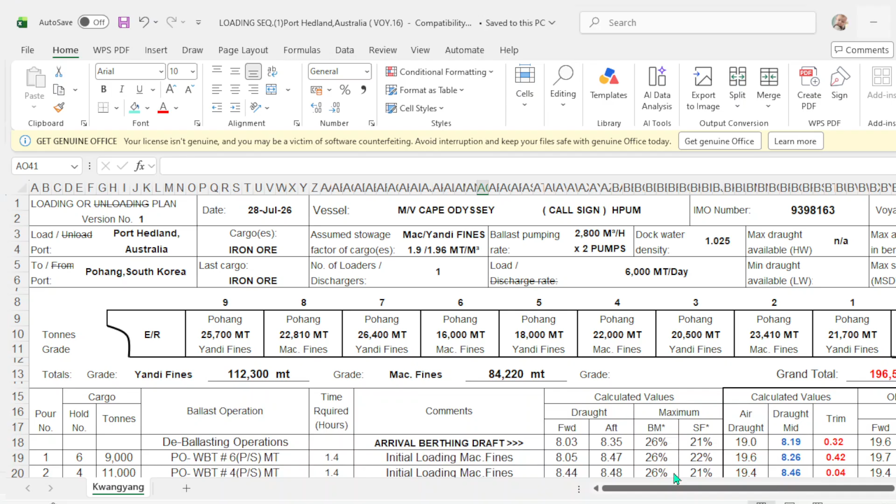This is an actual loading plan again, and the name of the vessel is Cape Odyssey. Take note of the date. It is the present date, due to the program of this laptop, but this was carried out long time ago. And the author of this, the one who made this loading plan, is Chief Officer Roque A. Cabanig. He's the chief officer that I relieved.

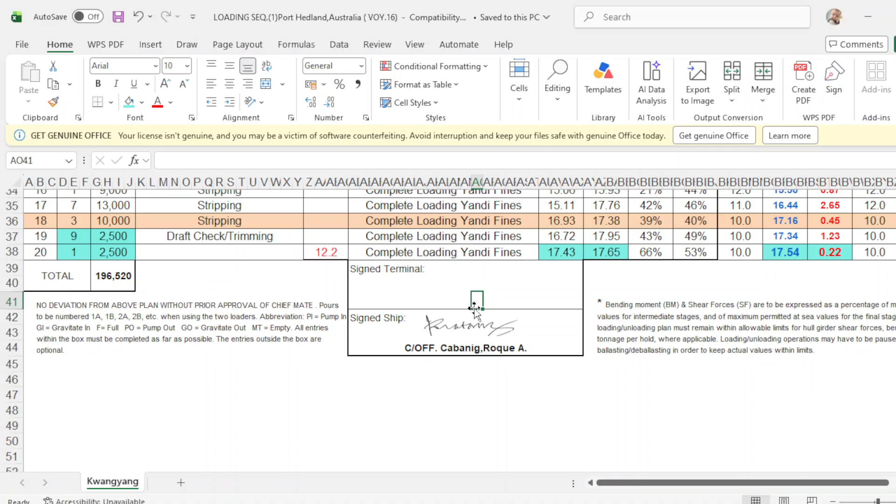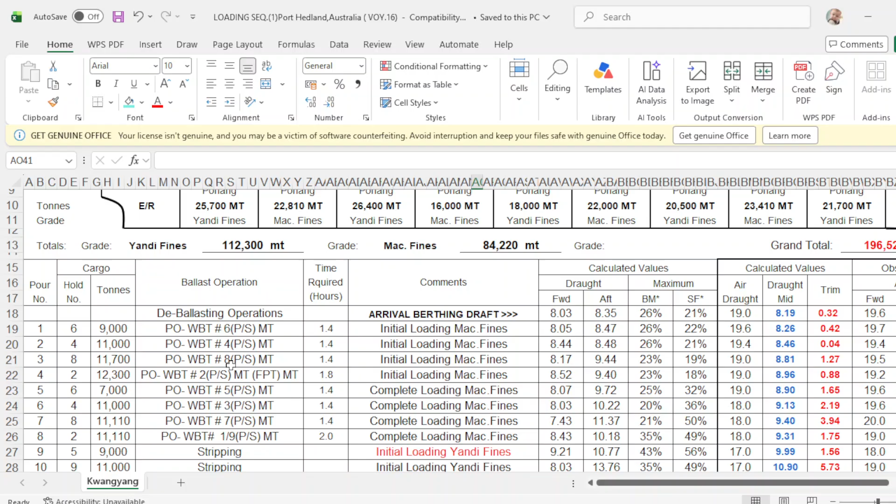Now, again, this is the pour. This is the cargo hold to be loaded and the amount of cargo to be loaded in its hold. This is the ballast operation, and this is number of hours of ballasting per ballast operation. And this is the arrival berth draft of 8.03 meters forward, aft is 8.35 meters. Bending moments is 26%, shearing force is 21%, the mid draft is 8.19, and trim is 0.32. Okay, so make this a little bigger.

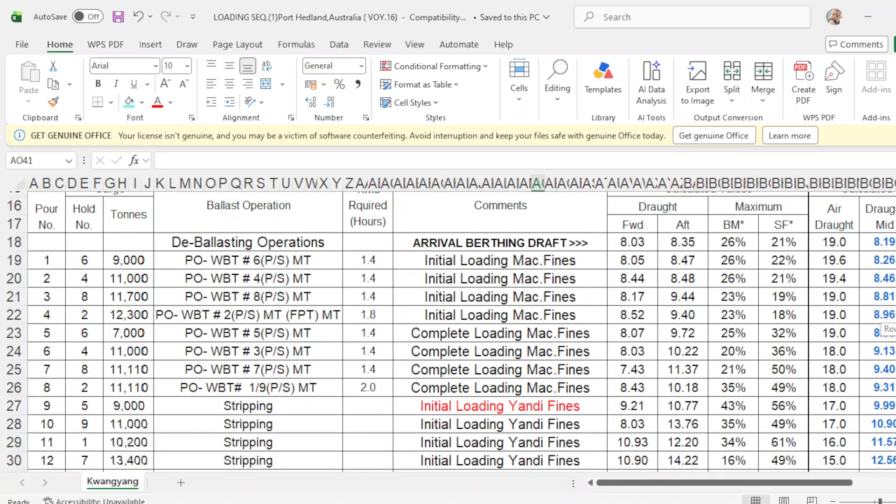Okay, then assuming that the operation is now continuous or ongoing, upon reaching pour number 18, the foreman will stop the loading operation upon completion of loading in hold number 3 of 10,000 metric tons. So he has advised the duty officer to ask the chief officer and the draft surveyor to take the draft reading around the vessel, forward, aft, and mid, so that they can compute for the remaining cargo to load for trimming.

Now, as soon as they completed the draft reading, they both agreed that forward draft is 16.93 meters, and aft draft is 17.38 meters, and the mid draft is 17.16 and the trim is 0.45. So with this agreed draft, we'll put it now into action with our program.

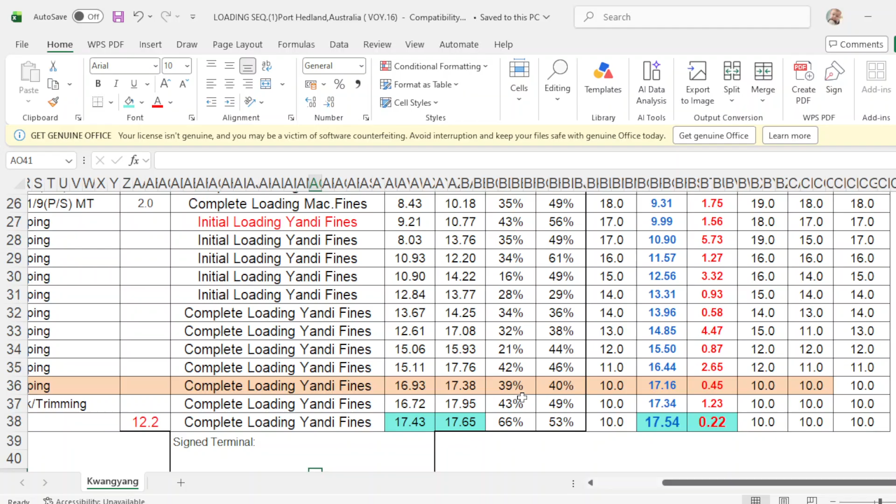So let's go to our program. This is the Cape Odyssey. So we go to form number 6, which is how to find trim when handling several moderate weights. So we put now the forward and aft draft. Forward draft is 16.93. Put here 16.93. And aft draft is 17.38. Here 17.38. Take note that the mid draft is 17.16 and trim is 0.45.

Double check. Mid draft is 17.16 and 0.45 the trim. So it's confirmed. Then you have your LCF, MTC, and TPC. And the actual reading of the mid port is 17.16. And the starboard mid draft is also the same of 17.16. So there's no list.

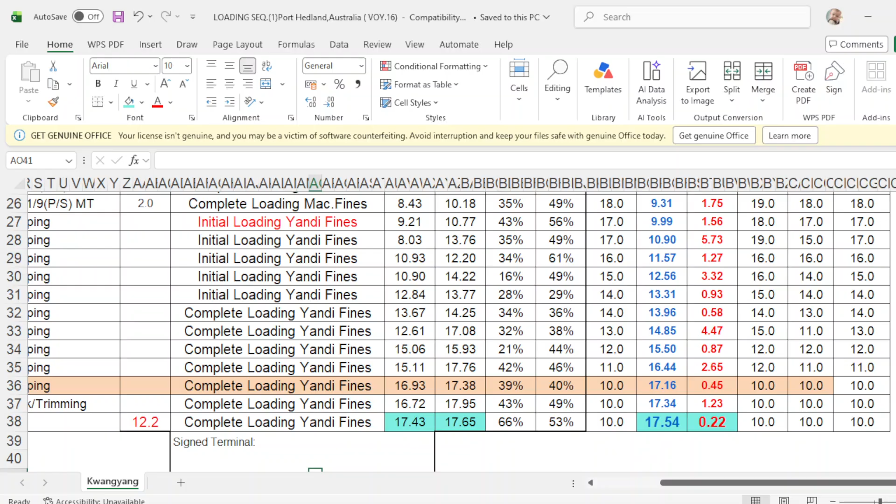And the departure mid draft is how much? 17.54. Put here 17.54. Take note that the density at berth of loading is 1.025 until completion. Once you put here the final mid draft, you will automatically get the sinkage.

Sinkage is 0.38. How do you get this one? Your final mid draft minus your actual mid draft is your sinkage of 0.38. And this will be the amount of recommended cargo to load for trimming. So click this one. You will have the formula K8 times M3 times 100. So letter K and row 8, that will be your sinkage, times your M3, which is your TPC, times 100.

So I will repeat. Total recommended cargo to load for trimming is sinkage times TPC times 100. Then you will get this amount. Take note, in your departure mid draft of 17.54, you will interpolate the TPC. So in the draft of 17.54, the interpolation of TPC is 138.68, which is this one. Now you have already this figure.

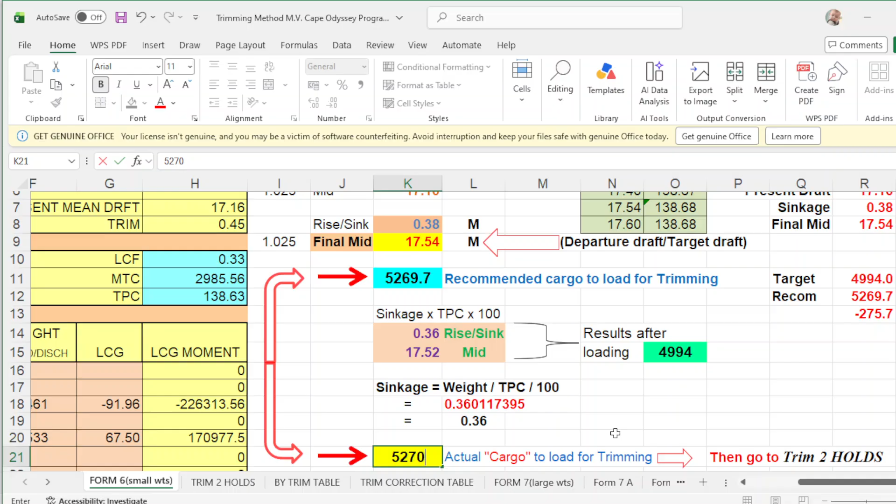5,270 to round it up. So once you put load 5,270, results after loading: then your departure draft, mid draft is 17.54, which is exactly the same here. And your sinkage is exactly the same here of 0.38. Okay?

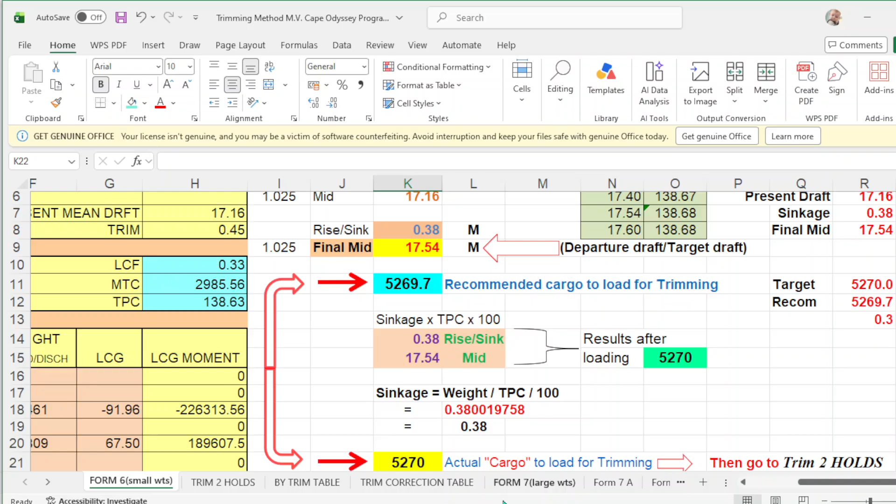Now, since this is your recommended cargo to load for trimming, for actual to load, so you put here 5270, which is rounded up, and you put the TPC of your initial draft. The TPC is 138.63. Okay, so 5270 divided by 138.63, that will be 38.01, and divide by 100, that will be 0.38.

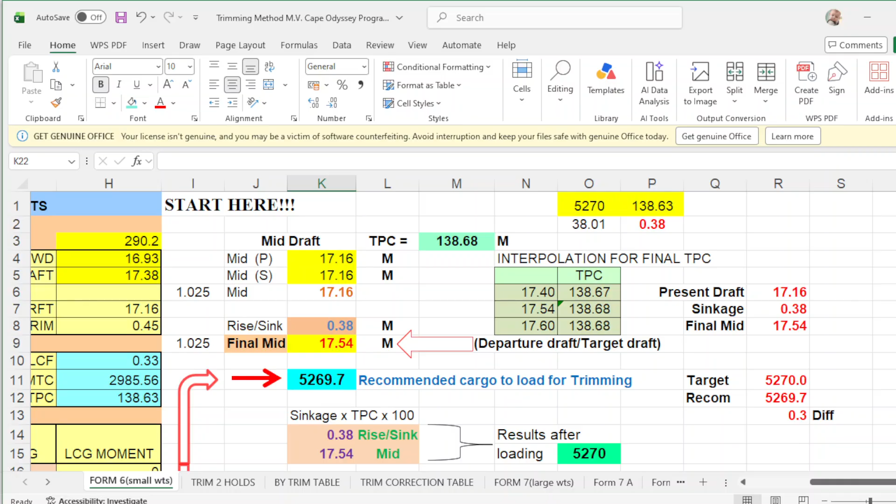Okay, your present draft, mid draft is 1716, and your sinkage is 38. This will be your final departure mean draft of 1754. Your target amount for trimming is 5270, which is this one. This is rounded up, and your recommended is 5269.7. Then there's a difference of 0.3. Okay,

so actual cargo to load for trimming, then you go to trim two holds. Trimming with two holds. Take note the remaining cargo is 5270. This is your initial draft, mean draft, and trim, MTC, LCF, and TPC. Now, what is our trimming hold? Trimming hold, according to our plan, is 1 and 9. So 1, enter, and 9. Okay, let's scroll down.

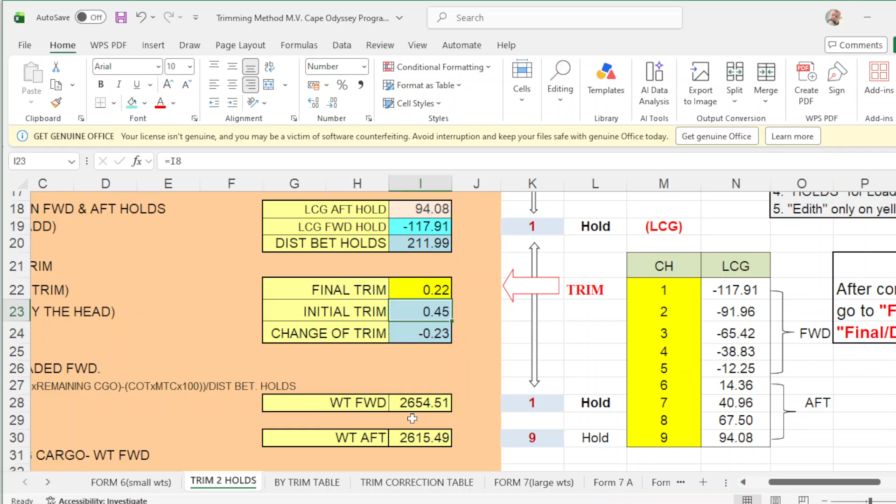What will be our final trim? Our final trim should be 22 centimeters or 0.22 meters. Put here 0.22 meters. Then the recommended to load for hold number 1 is 2654.5. So let's make this 2655. Then number 9 should be 2615.

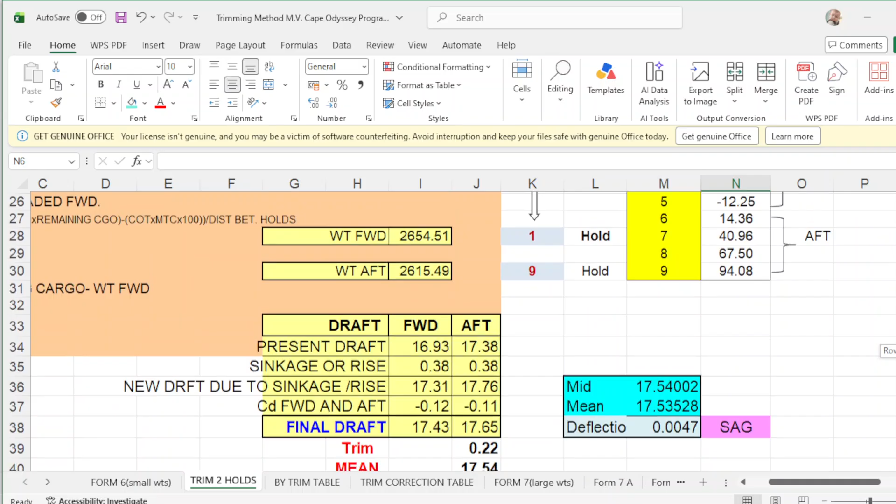There you go. And your departure draft forward will be 1743. And aft draft should be 1765. Okay, your trim is 0.22, your mean draft is 1754, and your deflection is 0. Okay, adjust this one.

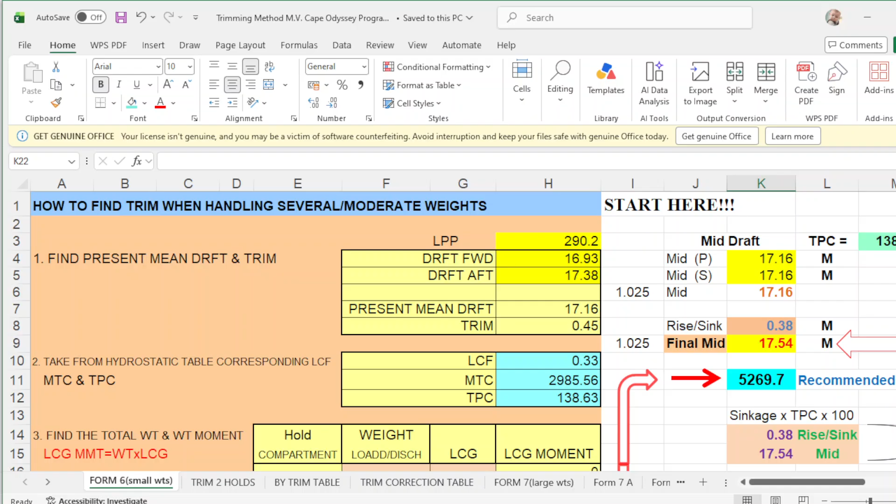Then you go back to form number 6, which is how to find trim when handling several moderate weights. Scroll down. Take note that in number 1, you have to load 2655, and number 9 is 2615. You put it here. Apply the LCG of 1 and 9. LCG of hold 1 is negative 117.91, and hold number 9 is 94.08.

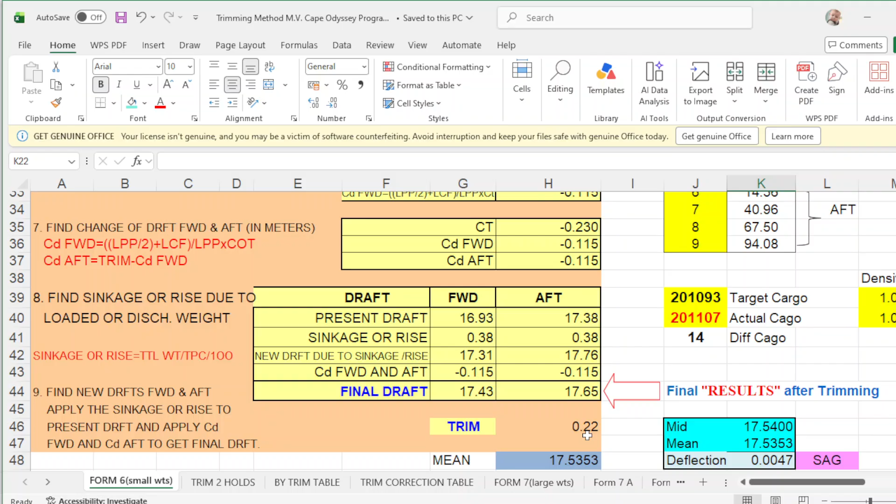Okay, confirm. Then your departure draft forward would be 1743, and aft draft should be 1765. Your trim is 0.22, your mean is 1754, and your deflection is 0.

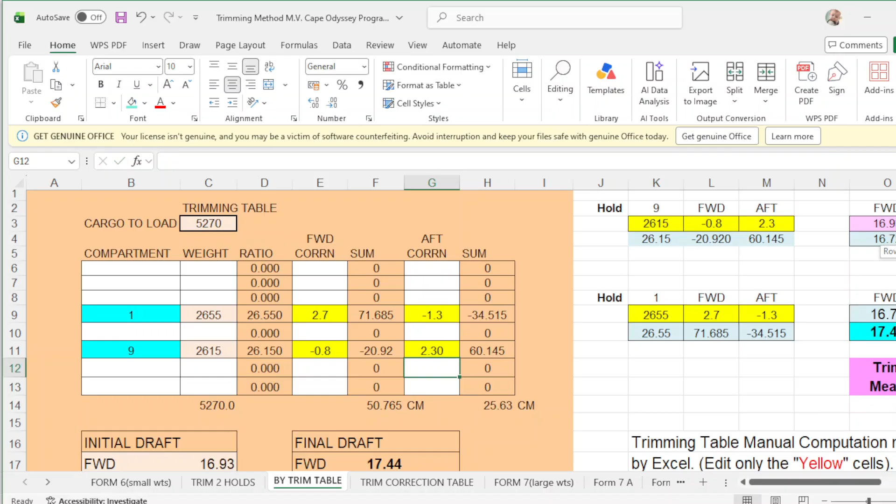And your sailing draft, forward draft should be how much? 1743. Okay, so it's 1 centimeter more. We reduce this one. Make this 2.69. There you go, 1743.

And aft draft should be how much? 1765. So it's less, so you add the correction. Put it 2.31. Nothing changes. Put it 2.32. Still doesn't change. Put it 2.33. Doesn't change. Add more. 2.34. There you go.

The forward, but the trim is 21, less. So you add, make it 5. Still 21. Add more. Put it 6. There you go, 0.22. Okay. So forward is 1743, aft is 1765, mean is 1754, trim is 0.22, and your deflection is 0. Okay?

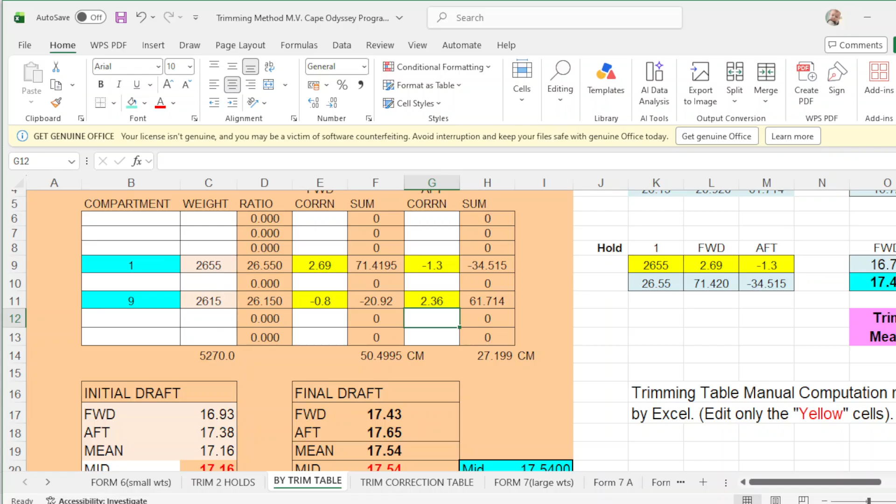Take note here, it doesn't say which hold to load first. So I recommend that we load hold number 9 first to have a good trim. So number 9, the amount is 2615. Correction forward, negative 0.8, aft is 2.36. Hold number 1 is 2655, forward is 2.69, and aft correction is negative 1.3. So confirm.

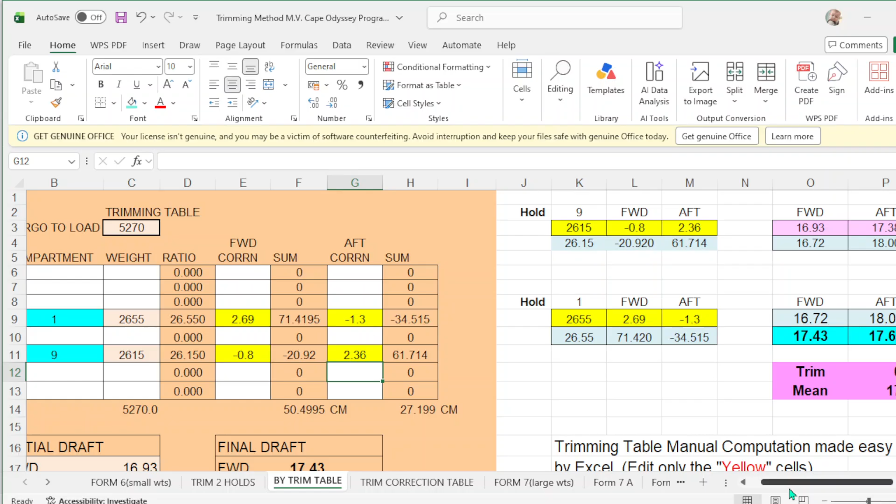So first you have to load in hold number 9 so that you will have a good trim. So after completion of hold number 9 of 2615, this will be your initial draft forward 16.72, aft draft is 18 meters. Then you will load in number 1 of 2655. After completion, after loading 2655, your draft forward will be 17.43, aft is 17.65, your trim is 0.22, and your mean draft will be 17.54, and your deflection is 0.

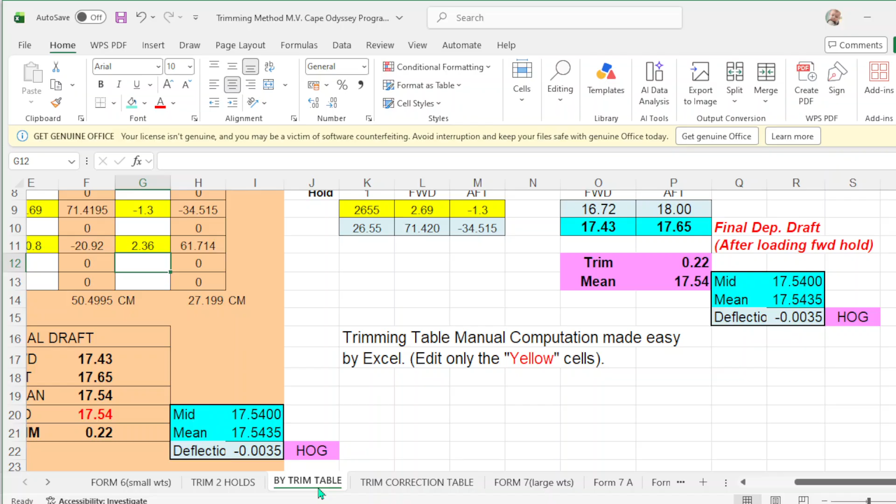Okay, which is the same here. So we have now 3 programs to back you up: form number 6, trim 2 holds, and by trim table. So we go to the last program, which is form number 7. Form number 7 is how to find draft and trim when handling weights involving large changes in draft.

Take note that the density at berth is 1.025. Okay, 1.025. So you put here 1.025, and upon completion the density will also be 1.025. That is the density. So what is the draft forward? The forward is 16.93. Put here 16.93. Draft aft is how much? 17.38. Put here 17.38. Okay, then scroll down.

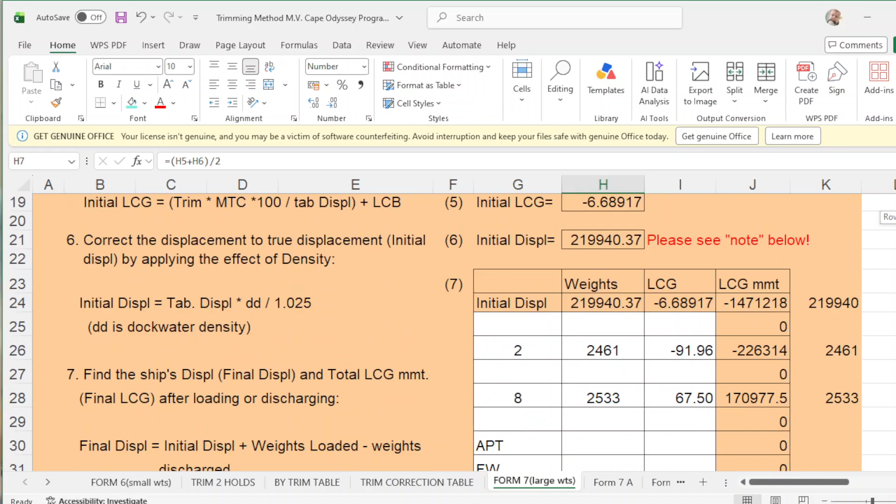You put now the amount of cargo for trimming. So what you do, this should be hold number 1, put it like this, go to trim 2 holds, then click 1. Then you go to the cargo, equals, then you go to this cargo. Okay, press enter, and the LCG of hold number 1, this will be, click this one, then there you go.

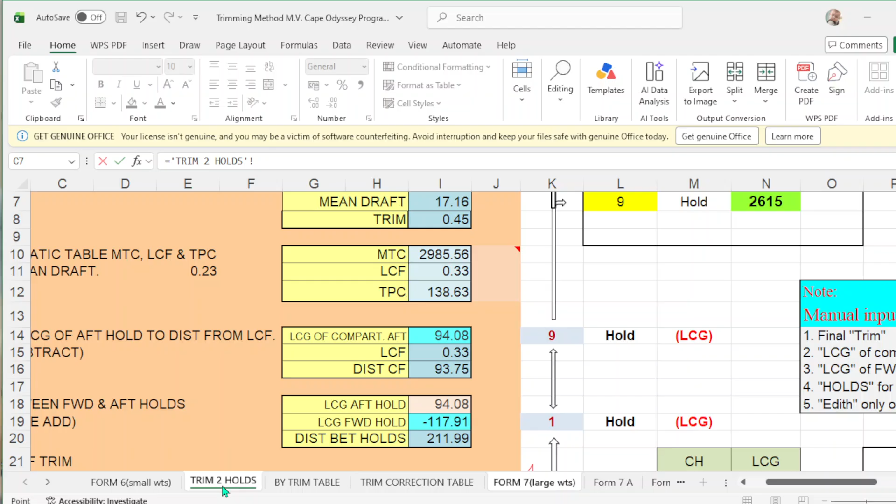Then the other cargo hold is hold number 9, press this one, equals, go to trim 2 holds, then you press this one, 9, there goes 9. Then the weight, put equals, go to trim 2 holds and click the weight. Then the LCG equals, that's hold number 9. Scroll down, and number 9 is this one. Okay, so updated this one already. Scroll down.

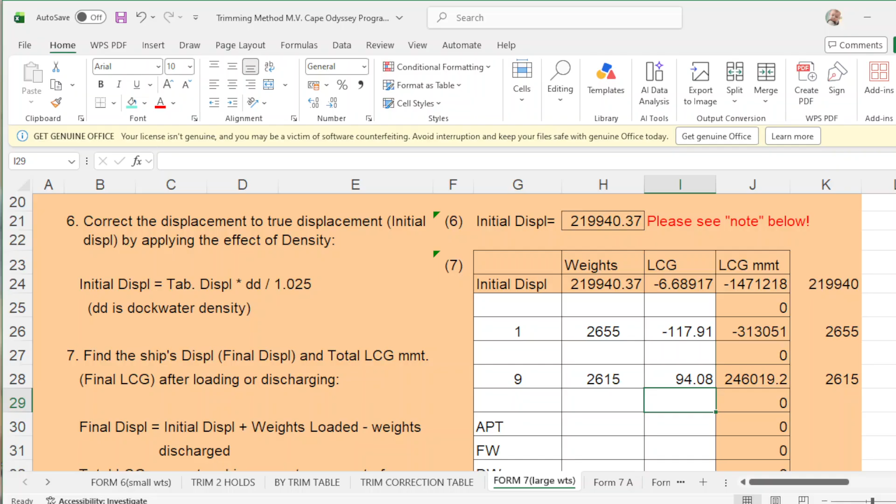And your departure draft forward is 17.43, and aft draft is 17.65, you have 17.64, and your mean draft is 17.54, and your trim should be 0.22. Okay, 0.22, and your deflection is 0. I mean, your mean is 17.54 and your trim is 0.22. If you round it off, then you have your 0 deflection.

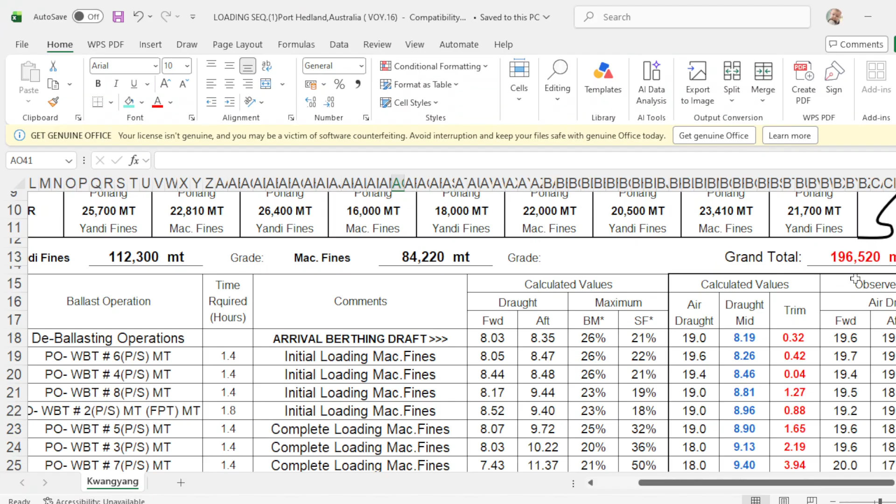Again, I will advise that what's more important is your mean draft. If your mean draft is 17.54, then you will have the exact departure draft or the amount of 196520. So in your program, form number 7, if your mean draft is 17.54, then you will get the exact amount. Regardless of your draft forward and aft, what's more important is if you can get the target mean draft of 17.54. Okay, so this is form number 7, that is number 1.

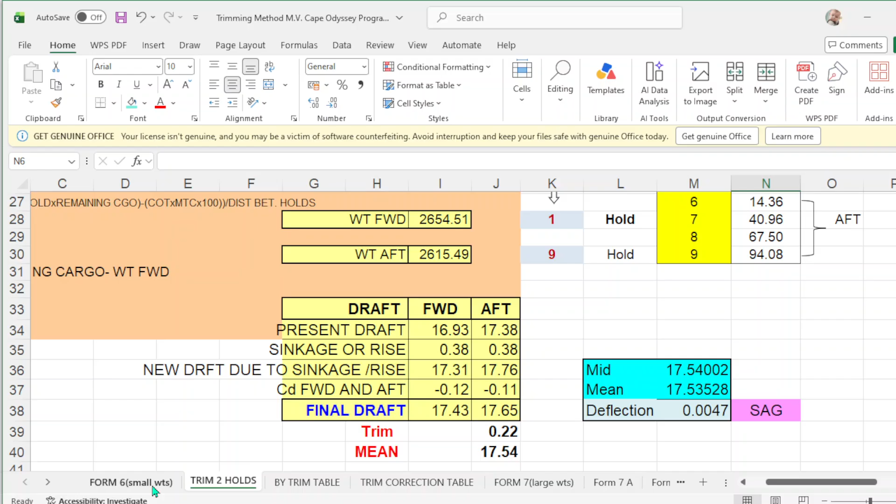Number 2, by trim table, the same departure draft and mean draft and your trim. And number 3 program, trim 2 holds, you still have forward draft of 17.43, aft draft of 17.65, 22 centimeters trim and 17.54 for your mean, 0 deflection here. And number 4 is form number 6. You still have the same forward draft of 17.43 and 17.65 aft, trim of 0.22, mean is 17.54. So you have 4 programs to back you up: form number 6, trim 2 holds, by trim table, and form number 7.

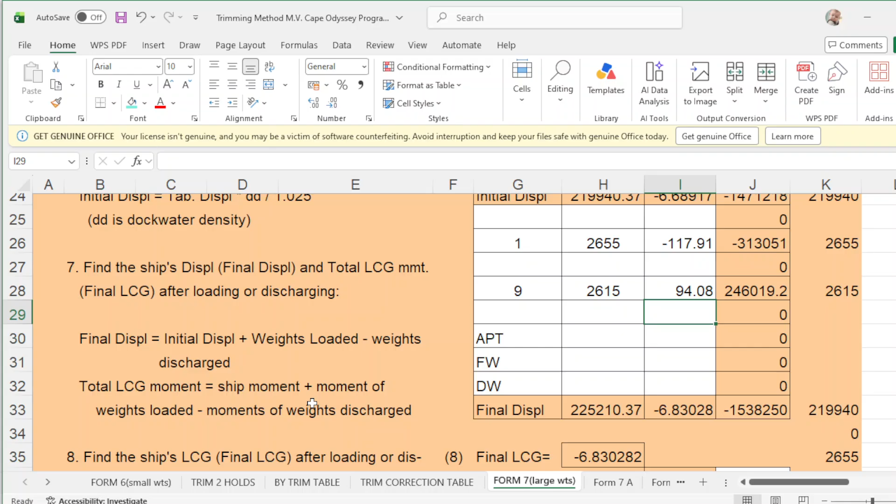Okay, so this loading plan is for a Capesize vessel, Cape Odyssey. Okay, now with the same figures here, we will try to use another Capesize vessel. This time we will use MV CPO Europe. Okay, this is another vessel. So let's start with form number 6.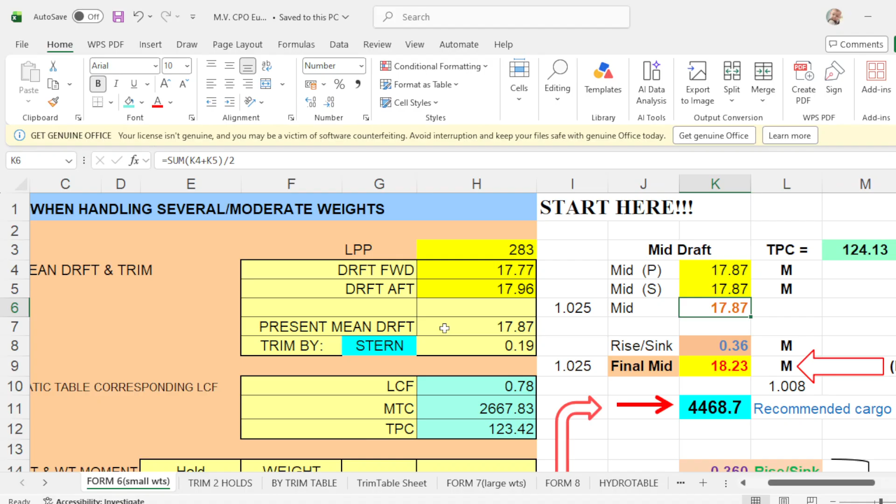What was the initial draft? Initial draft is 16.93. Put here 16.93, and aft draft is 17.38. Okay. Take note, your mean is 17.16, trimmed by the stern of 0.45, your LCF, MTC, and TPC. So, actual mid port is 17.16. Then your mid starboard is 17.16. Okay.

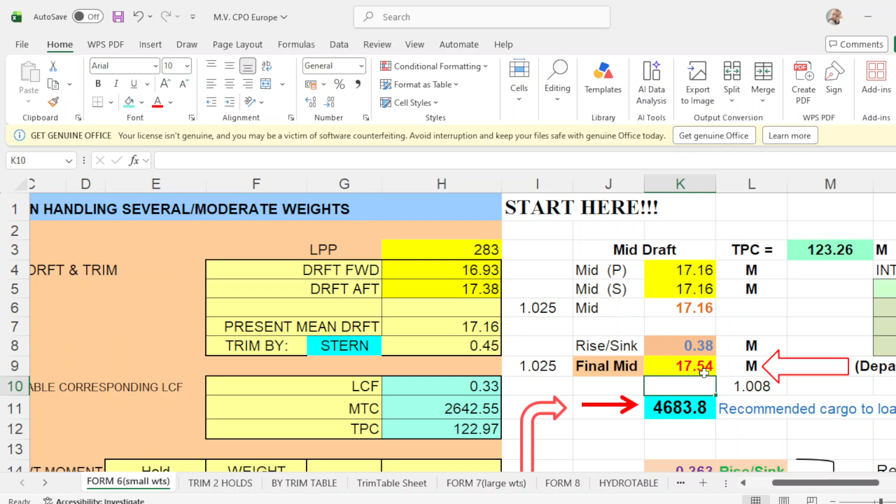The density at berth is 1.025. Upon completion, the density is still 1.025. Your departure draft is how much? Departure draft is 17.54. Put here 17.54. Okay. With this final departure draft, the recommended cargo to load is 4683.8. Okay. So you scroll down, just follow this arrow, then round this up, 4684.

So once you loaded 4684, after loading 4684, your mid departure is 1754, which is exactly the same here, and your sinkage is 0.38, which is the same here.

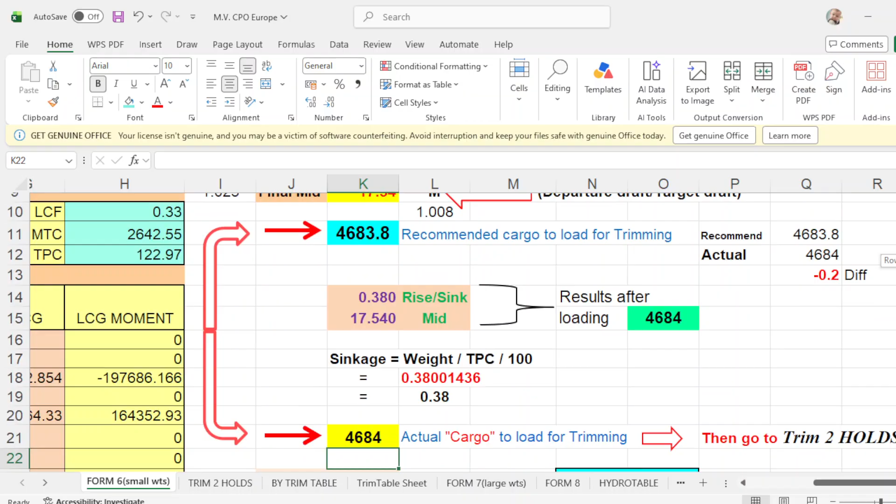Since your cargo to load is 4684, you put here 4684, and the TPC of your initial draft is 12297. So 4684 divided by 12297 will be 38.09. Divide this by 100.

That will be 0.381 or 0.38. Your present draft is 1716. Apply your sinkage of 0.38. Then your final departure will be 1754, and the recommended cargo to load for trimming is 4683.8.

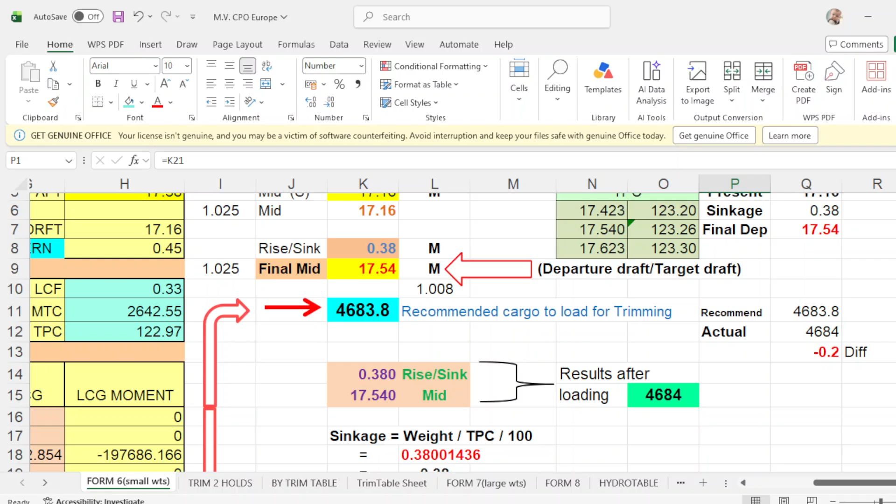The actual cargo to load is 4684. Then there's a difference of negative 0.2. This is the actual cargo to load for trimming is 4684.

Then you go to Trim 2 Holds, trimming with 2 holds. Take note, this 4684, your initial draft, mean draft, trim, MTC, LCF, and TPC.

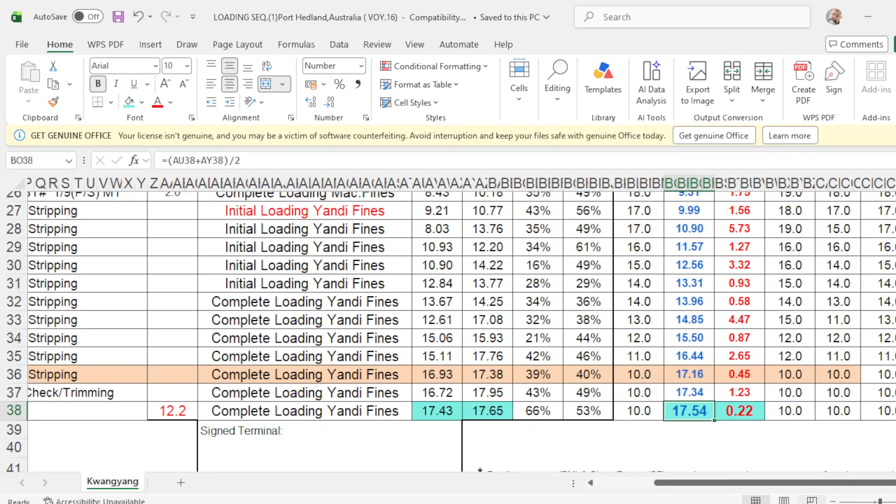So what is the trimming hold? Trimming hold is 9 and 1. Take note, guys, this is 2 and 8.

This will also change, this 2 and 8 and this one. So we put here 1, there 1, and 9. Take note that it has already changed to 9 and 1.

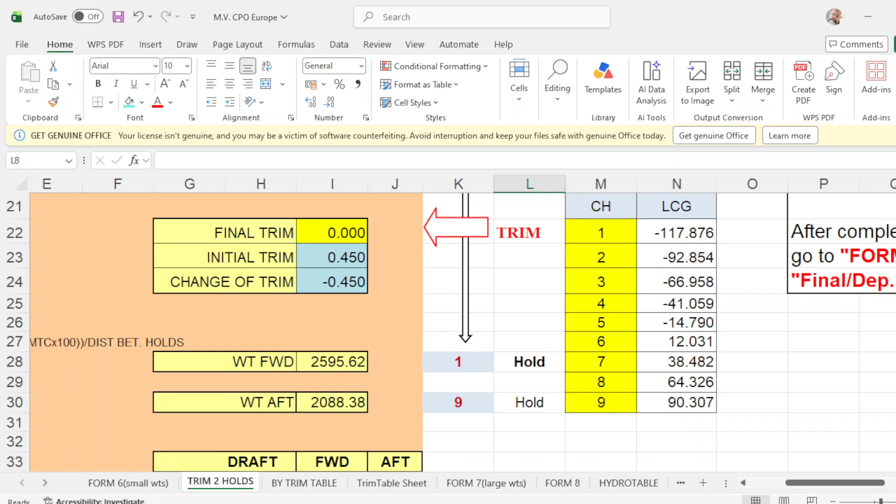Now, how much then your trim? What should be your trim? That will be... Final trim should be 22 centimeters or 0.22 meters.

So you put here 0.22. And your final departure draft would be... the recommended cargo to load for hold number 1 is 2316, rounded off to 2316.

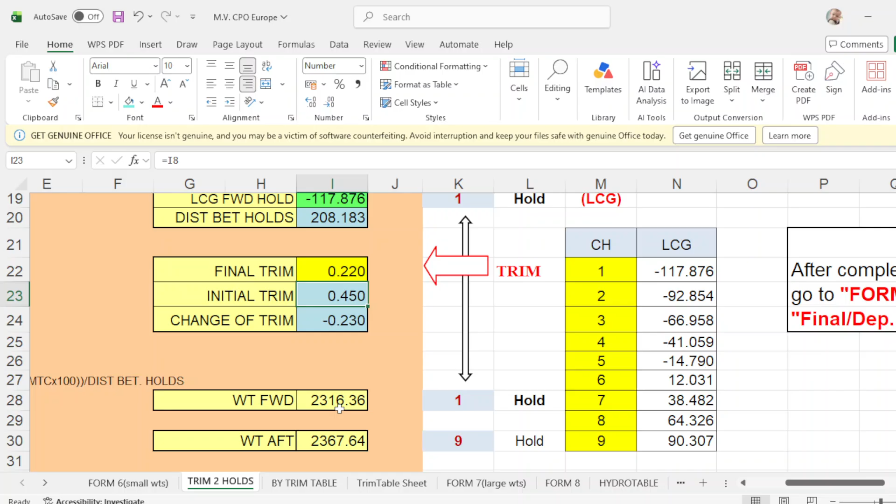You put here 2316, 2316. And number 9 should be 2368. Okay, and your final departure draft forward would be 1743.

1743, and aft should be 1765. Your trim should be 022 and your mean draft is 1754.

If you run it up, you now have your deflection of 0. How do you get deflection? Mean draft minus your mean draft is your deflection, which is 0. So this is the first program.

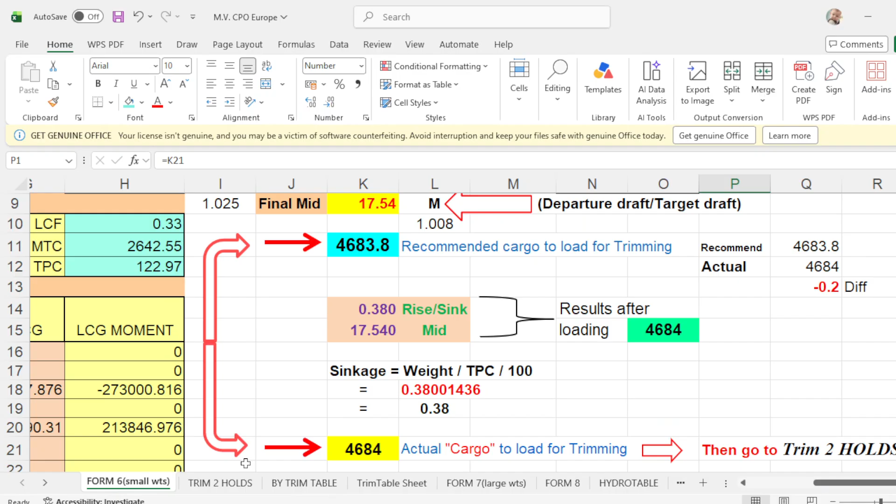Form number 6, and your trim 2 holds. Then we go by trim table.

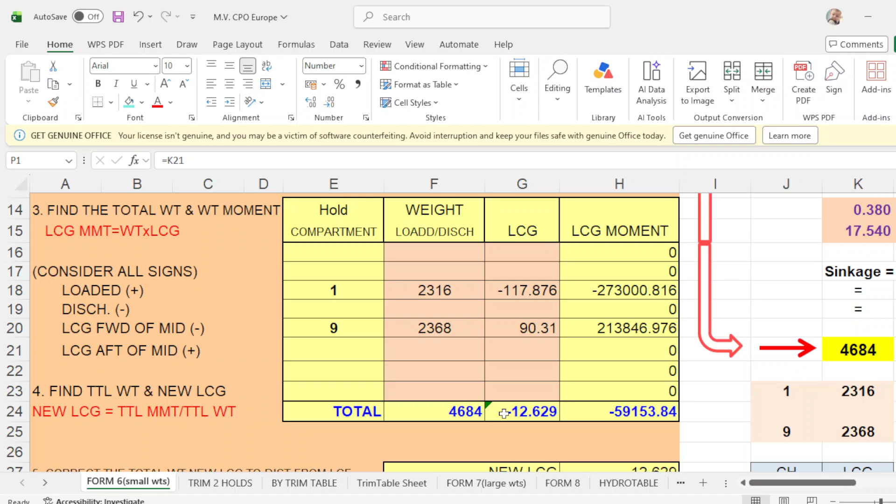Take note that the trimming cargo to load is 4684. It is 4684. Trim table, of course.

4684. And number 1, number 9 is the trimming hold. The amount is 2316, 2316. Check on that: 2316, 2368.

Then apply the forward correction of number 1 and number 9. Forward correction of number 1, this is CPO Europe. So forward correction number 1 is 2.7. Put here 2.7.

And aft correction is how much? Negative 1.3.

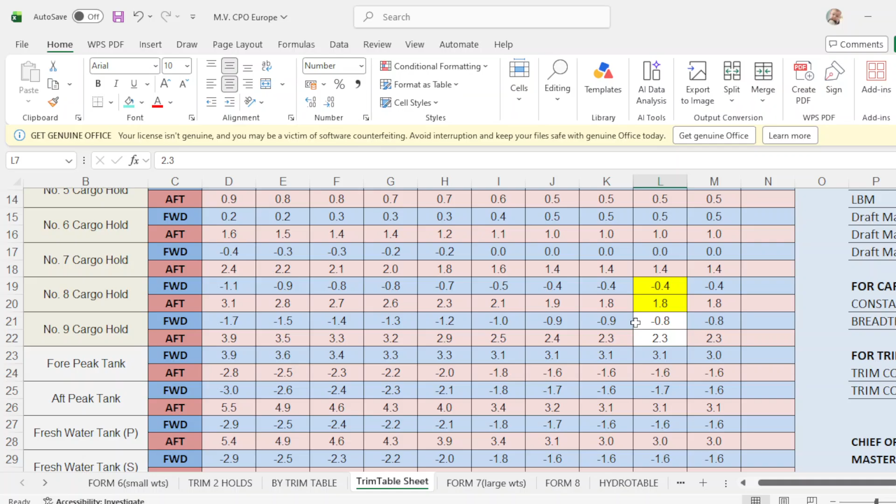And number 9, forward correction. Scroll down. So this will be number 9, forward correction is negative 0.8. And up correction is how much? 2.3.

Then you put here 2.3. Then departure draft forward is 1737, aft draft is 1762, and your trim by the stern is 0.26. It should be 22.

So less draft forward, so you adjust the correction forward. So drop should be how much? 1743, this should be 43.

So increase this one to 2.8. There you go, 39, 42.9. 1741, make it 3 meters.

So it's more, that's so 2.99. Make this 2.99, 43.

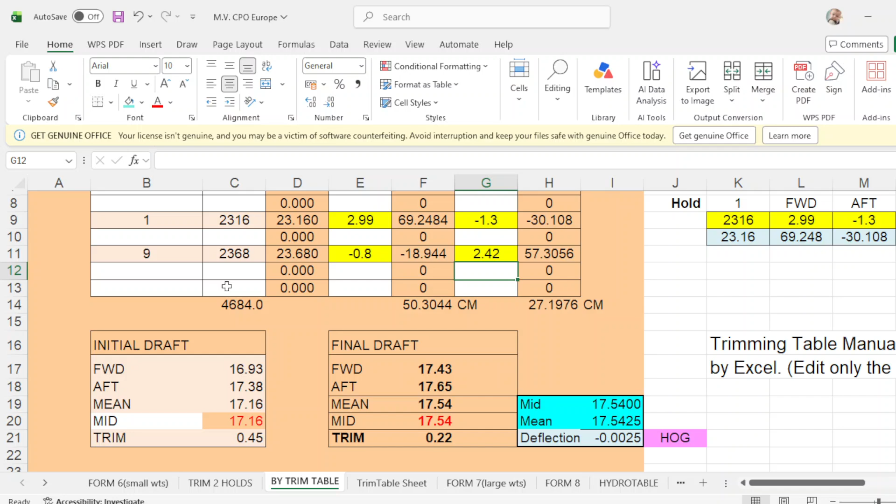There you go. Forward is 1743. Aft draft is 1765.

Your mean draft is 1754, and your trim is 0.22.

No, it increases. So it should be 2.42. Then we have this drop. Then we go now. This is 1, 2, 3.

And the last program, we go to form number 7, which is how to find drop and trim when handling weights involving large changes in mean draft.

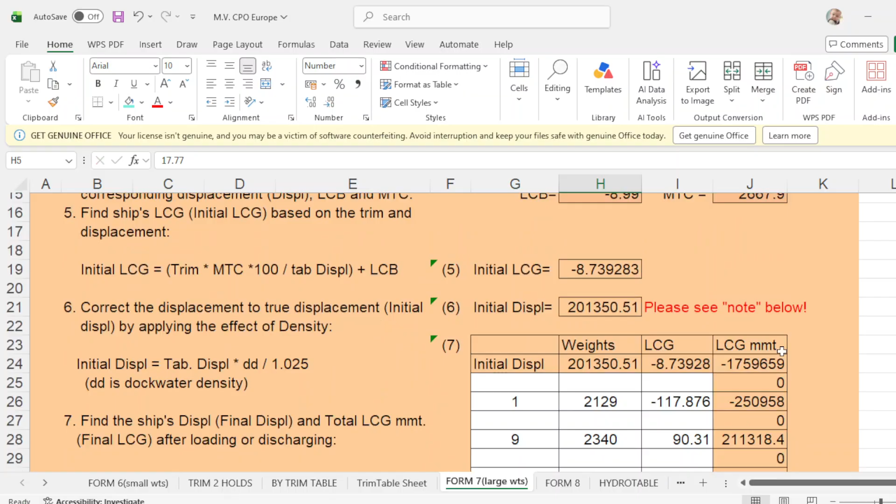Take note of the initial density at berth was 1.025, and until completion, the density is 1.025.

And the initial draft forward is 1693. Oh, we can use this one, 1693.

16.93. Draft aft is 1738. 17.38. Okay.

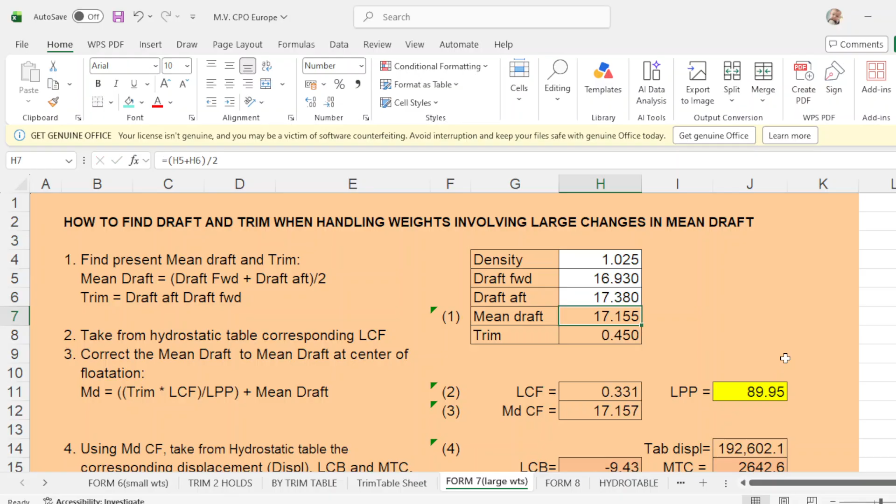So what is this? Now your trimming hold is 1 and 9. How much cargo to load in number 1? Number 1 is 2316.

Click this one. Click this one equals number 1, 2316, and number 9 what equals? Click trim 2 holds, then click number 9, the amount of cargo. Okay, check the LCG.

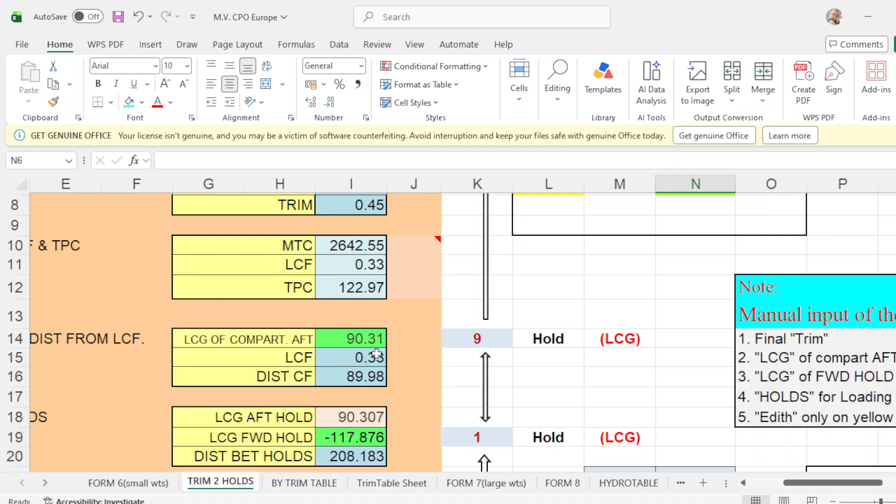Scroll down. LCG of number 1 is negative 117.876, and number 9 is 90.31. Okay, so confirm, same.

And your departure draft will be forward of 1743, aft draft is 1765, and your mean draft is 1754.

And your trim should be 022. If you run off this one, this should be 022.

Again, I say the mean draft is more important, because if you get this 1754, which is according to your plan, if your mean draft is 1754, then you will get the target total amount of 196520.

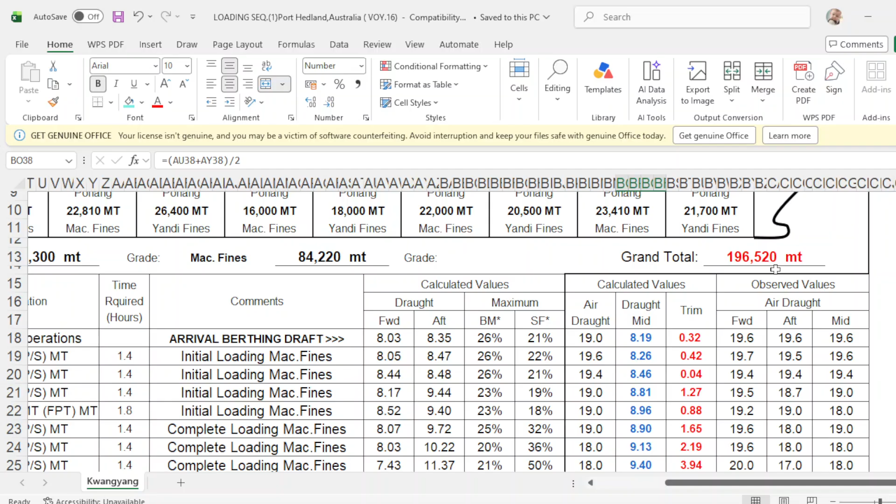So this is CPO Europe. Then we go now to the last vessel, which is MV Cape United. This is also a capesize vessel. So let's go to the draft forward.

Okay, draft forward is 1693, 16.93, and aft is 1738, 17.38.

Then you have your mean draft of 1716, trim of 045, LCF, MTC, and TPC. So your actual mid port is 1716, 17.16, and starboard is 17.16, 17.16.

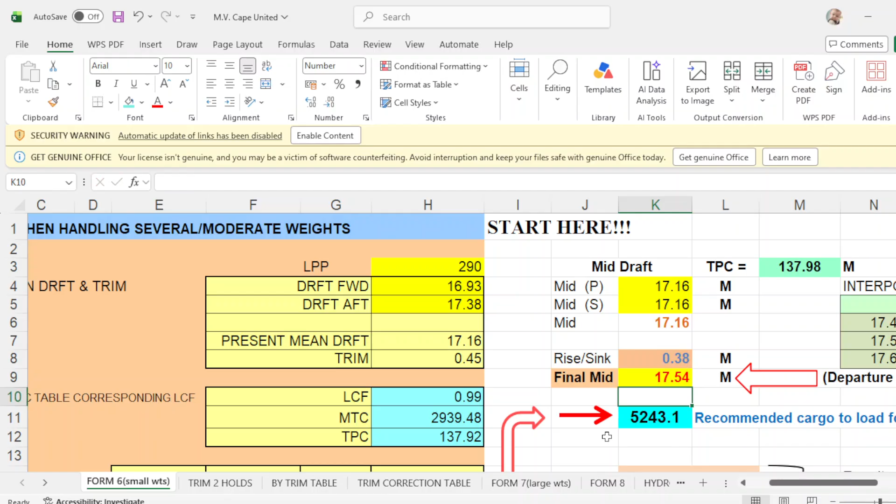And your departure draft is 17.54. Okay, put here 17.54. Then your recommended cargo to load for trimming is 5,243.

But according to your plan, your recommended cargo to load is only 5,000. But you recommend only for 5,243. Okay, you follow the initial density forward.

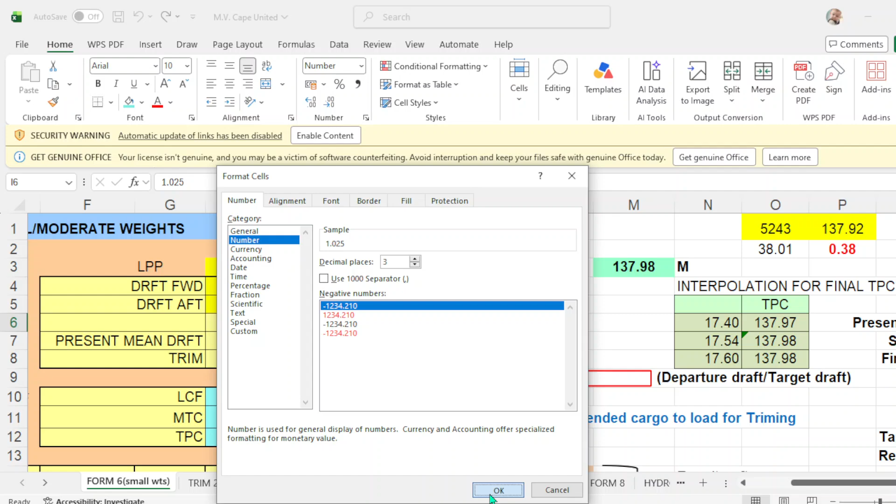The initial density of loading at berth is 1.025, and upon completion is 1.025. Okay.

Copy and paste. Okay, since this is the recommended cargo to load of 5243, so you put here, follow this one, put here 5243.

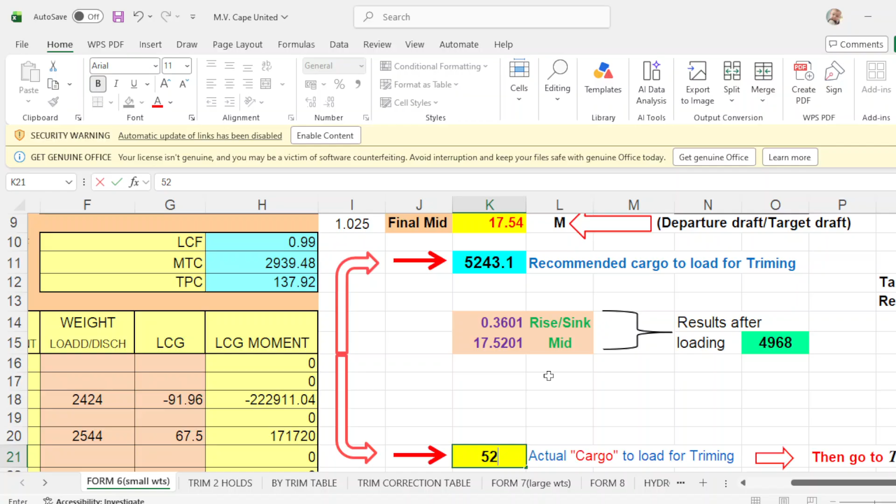Then results after loading 5243, then your departure draft, mid draft is 1754. This is exactly the same here, and your sinkage is 0.38, which is the same here. Okay.

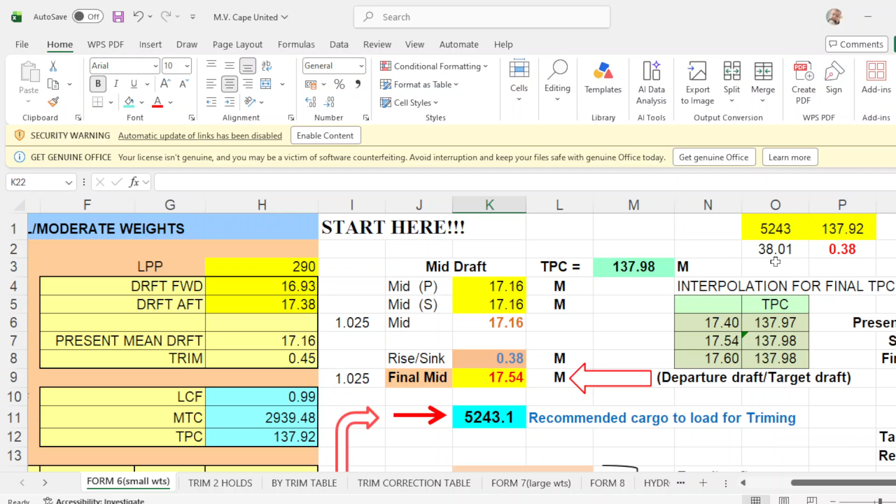And take note again, to get another sinkage, your recommended cargo to load trimming is 5243. Put here the TPC of your initial draft, which is this one, 13792. So divide 5243 by 13792, that would be 38.01. Divide this by 100, that would be 038.

Okay, and your present draft is 1716. Your sinkage is 38, and your final mid draft is 1754, which is this one, and your target draft is, which is this one, 5243, and the recommended is 52431, and your difference is negative 0.1.

Okay, then you go to trim 2 holds. Take note, the cargo to load is 5243, which is this one, 5243. Okay, this is your initial draft, mid draft, MTC, LCF, and TPC.

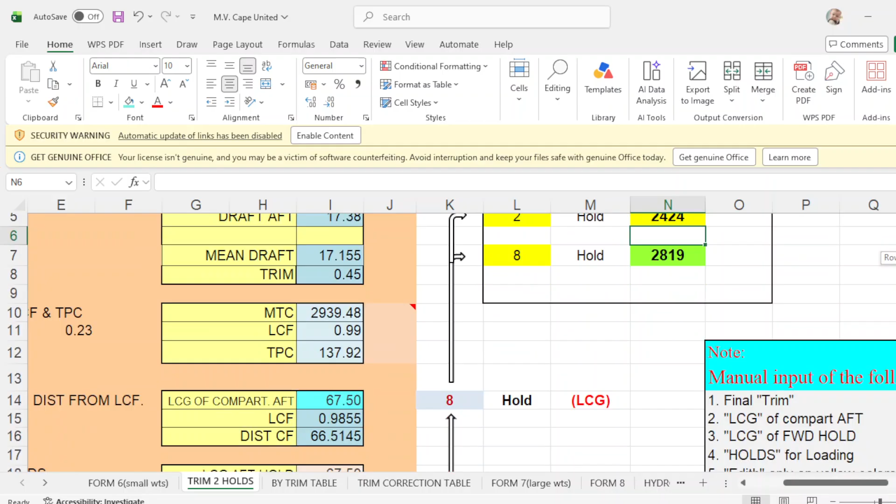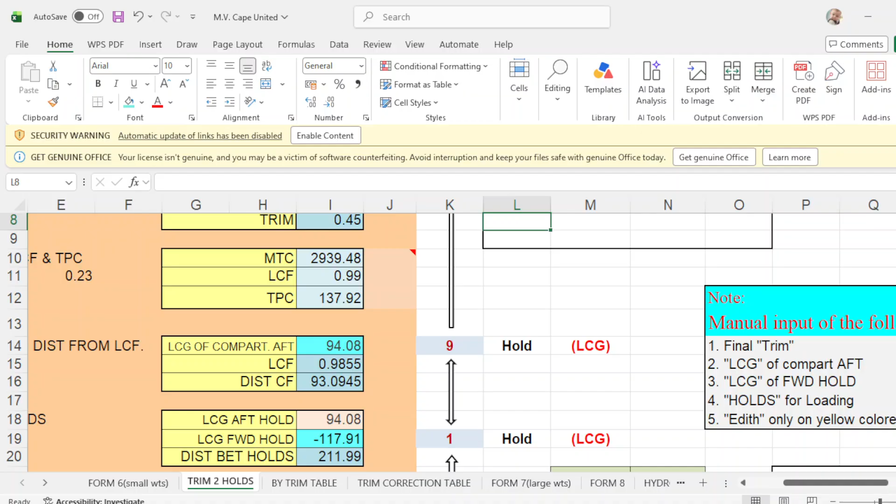Again, change the trimming hold is 1 and 9. Take note, this will change. This will also change. Okay, so put here number 1, cargo hold number 1, there, and cargo hold number 9. And take note, it has already changed to 1 and 9, and change here 1 and 9.

Okay, once you change this cargo hold for trimming of 1 and 9, what will be our recommended trim? Okay, according to our plan, our trim should be 22 centimeters. Okay, so 22 centimeters, put here 0.22.

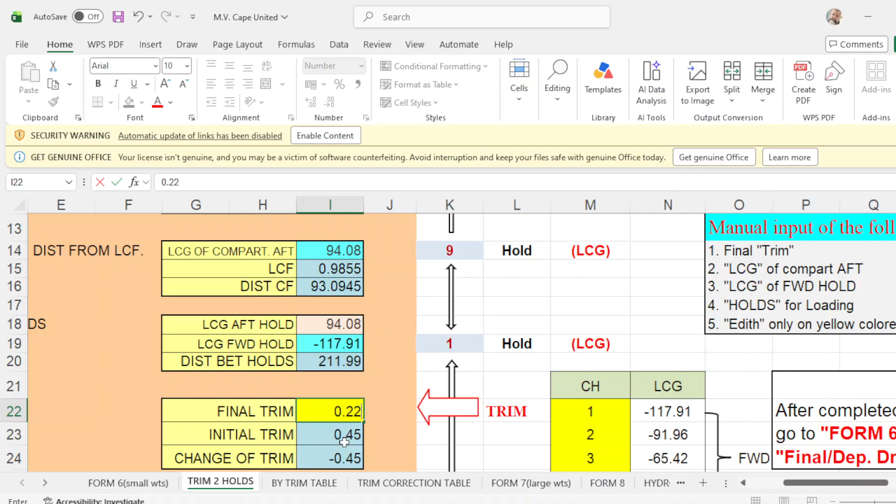Then it will recommend what to load in hold number 9 and number 1. So number 1, you recommend to load 2621. Put here 2621, and number 9 should be 2622.

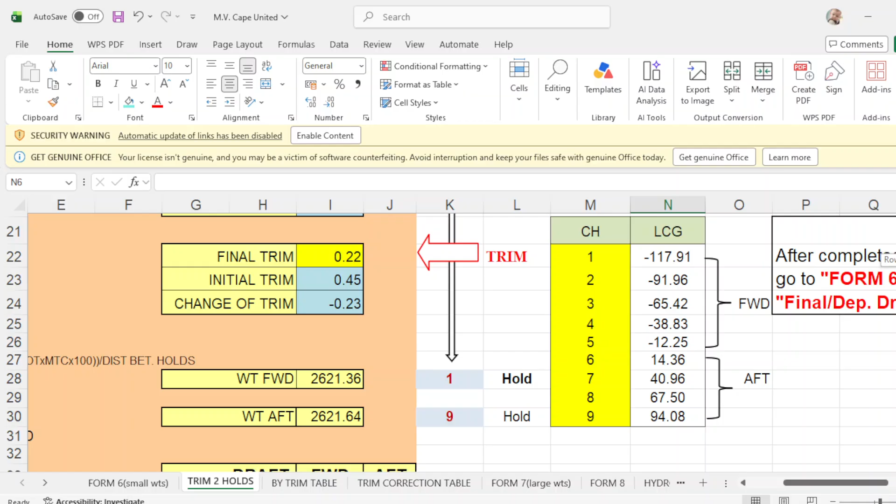2622. Run it up, and your departure draft will be forward of 1743, aft is 1765. Your trim is 22, and your mean draft is 1754.

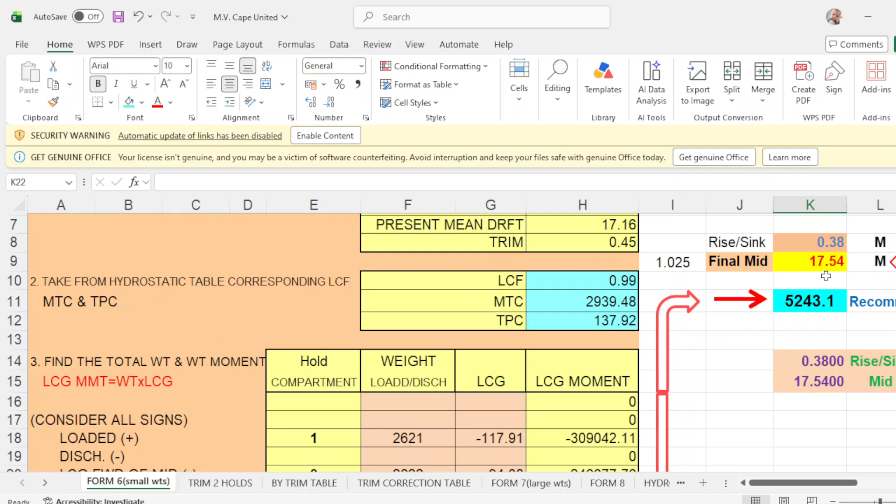Okay, 1754 for this one, departure draft 1754, and your deflection is 0. Okay, mid minus mean equals 0 deflection.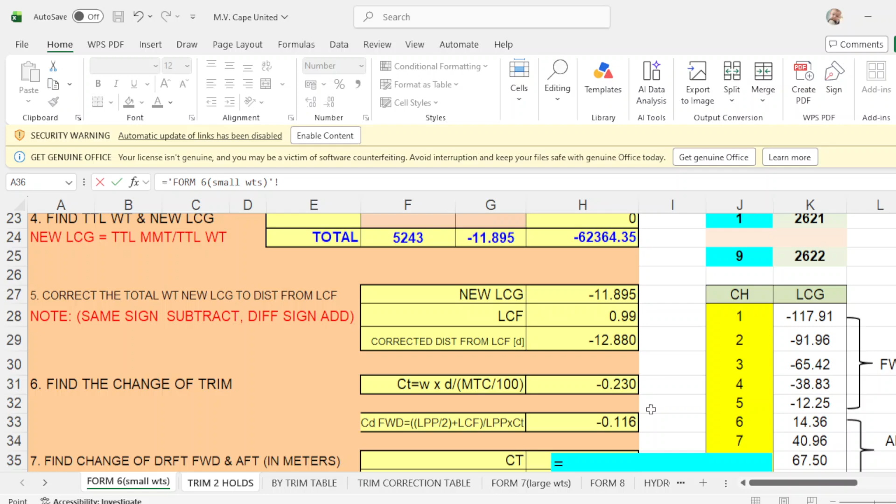So how do I get this one? Put this, okay, or 0. So I'll get this one, mid, put equals, go to form number 6. This is your departure mid. Okay, enter, and your mean equals, this will be your mean.

Then that will be program number 1 and number 2. Program number 3 by trim table, trimming table. Take note of the cargo to load is 5243. Okay, 5243. This is number 1 for trimming hold 1 and 9.

This is the amount cargo for trimming of 1 and 9. So 2621, and 2622. Okay, 2622.

So we now apply the correction, forward and aft correction, hold number 1 and hold number 9. So hold number 1, cape size, number 1, this will be 8. Okay, put this, no field. So number 1 is 2.7. Nearest 18. The draft, your departure draft is 1754, so it's almost 18 meters.

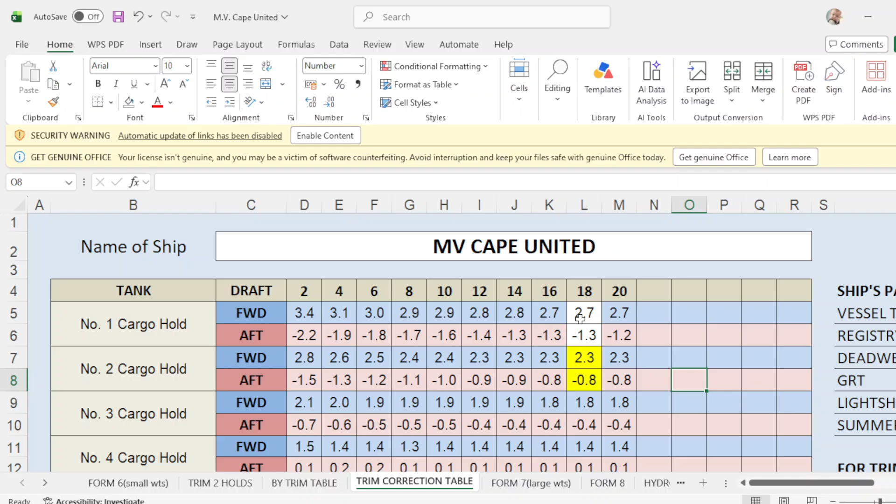That's why I choose 18 meters and not 16. So the nearest, so forward hold number 1 is 2.7. So put here 2.7, and aft correction is how much? Negative 1.3. Then a forward correction in number 9. Scroll down.

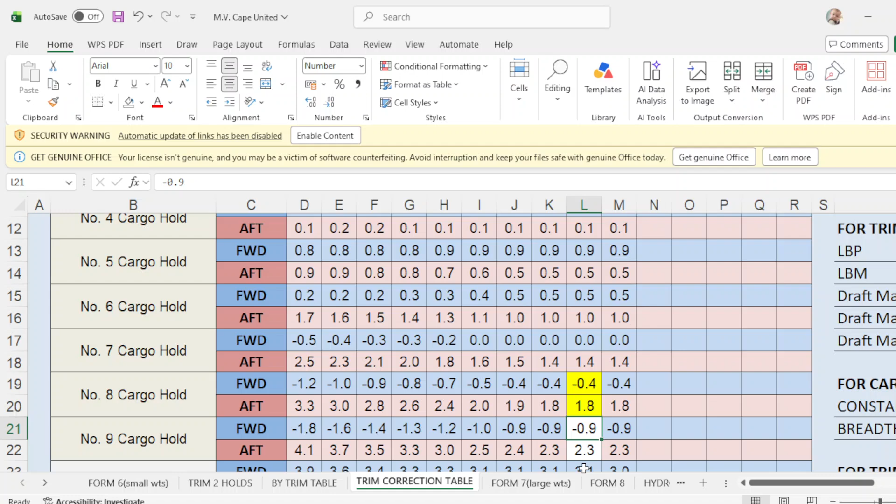So this is number 9. Number 1, forward correction on hold number 9 is negative 0.9. Put this negative 0.9. And aft correction is how much? Aft correction is 2.3. Put here 2.3. And your departure draft is how much?

So forward is 1740 less, aft is 1764 less, and your trim is more. So adjust the forward correction. Adjust the forward correction. So increase this one. So we have to increase also this one. Make it 2.8.

Now 1743. So now we have to adjust now in aft. So we have to also increase. Make it 2.4.

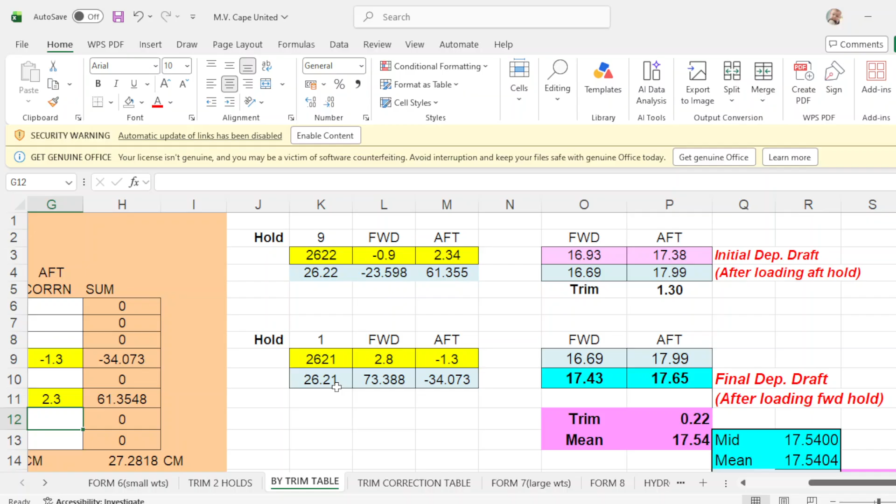She's here. It doesn't say which cargo hold to load first. So I suggested that I have to load first in hold number 9 to have a good trim, and hold number 1 after. So take note.

Number 1 is 2621. You have 2621. Correction is 2.8. 2.8. Aft is 1.3. Number 9 is 2622. Forward is negative 0.9. Aft is 2.34. Okay. Click this one.

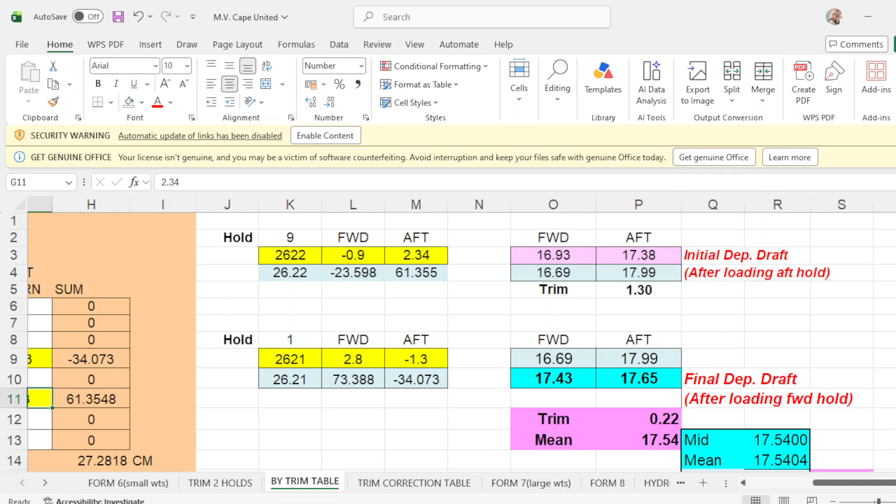2.34. Okay. Then your final draft will be forward 1743. Aft draft is 1765. Trim is 022. Mean draft is 1754. And your deflection is 0. Okay. Put this one. Okay.

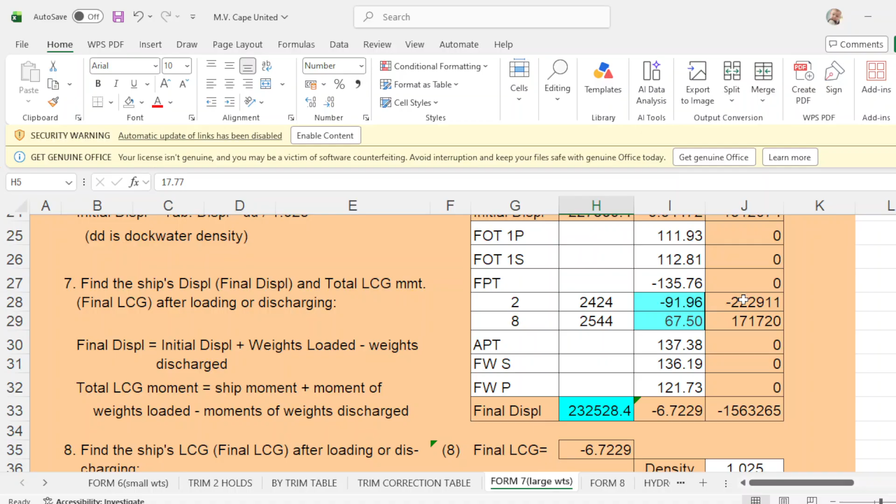So the same. That is 1, 2, 3. And the last program is for number 7, which is how to find draft and trim when handling weights involving large changes in draft. So the density at berth is 1.025.

1.025. Until completion, the density will also be 1.025. Okay. So what is our draft forward? The forward is 1693. Put there 16.93. Aft 1738. Put there 17.38. Take note, mean draft is 1716.

The trim is 0.45. Then our trimming hold is 1 and 9. So adjust this one. This equals. Go to trim holds 2. Click this one. And number 9. What equals. Then go to trim holds 2.

Click hold 9. And what is the amount of cargo in number 1? Equals. You go to trim holds 2. Click this amount. Enter. And again equals. Go to number 9. Click this one.

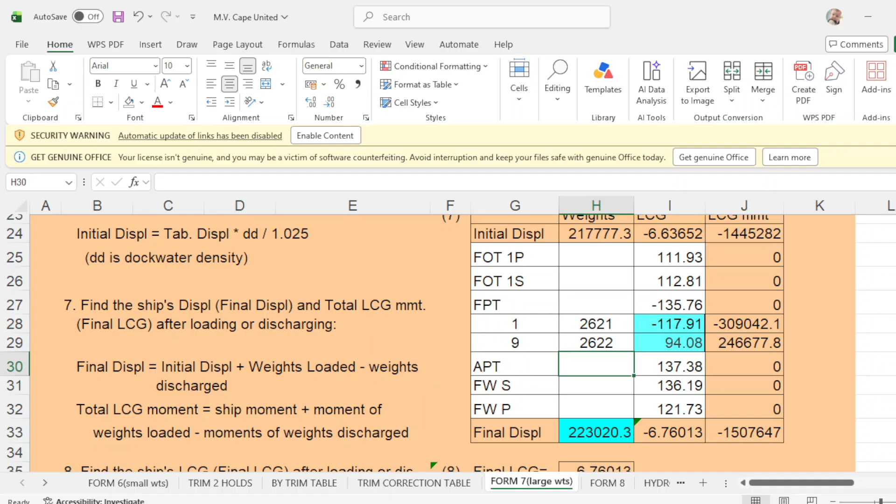Okay. Now check the LCG. Okay, check the LCG. Scroll down. LCG of number 1 is 117.91. 117.91 and number 9 hold LCG is 9408. Number 9 is 9408. Okay.

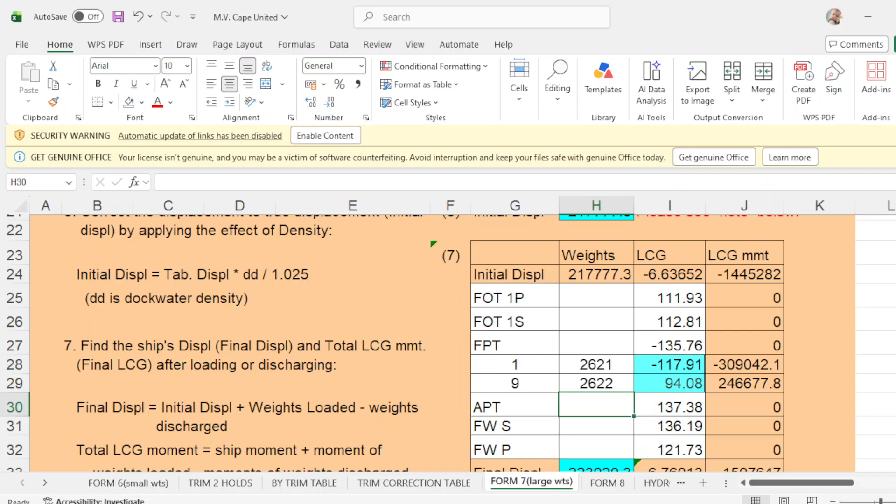So it is confirmed. Your departure draft forward is 1743. It is forward is 1743. Aft draft is 1765. Your mean draft is 1754. And your trim is 022. 022. There you go, and your deflection is 0.

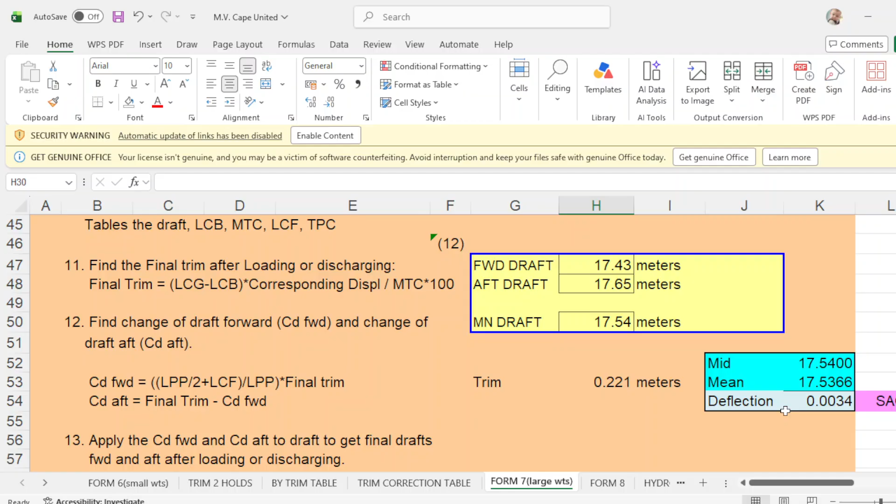So you have 4 programs to back you up. This is form number 7, which is how to find draft and trim when handling weights involving large changes in mean draft. Then you have by trim table. Okay. And the departure draft is forward 1743, aft 1765, mean is 1754. Your mid is 1754. Your trim is 22. That is your second program.

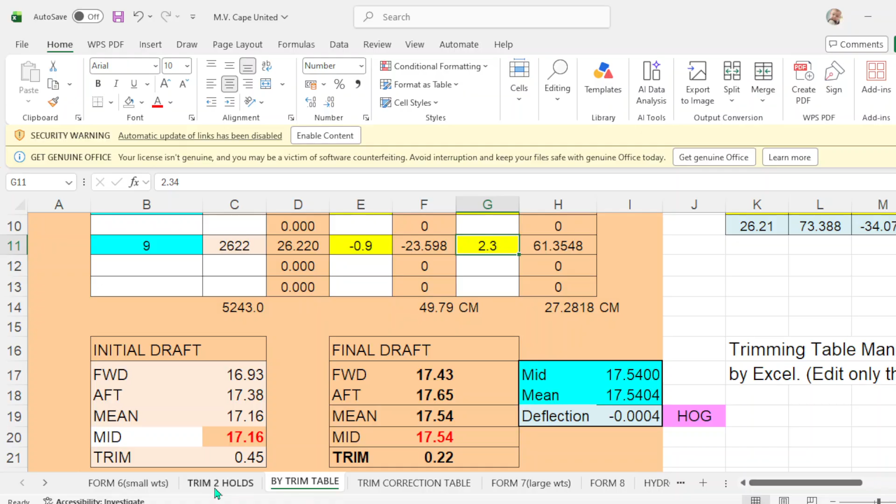And the third program is trim 2 holds. Okay. Trimming 2 holds. And your forward draft is 1743, aft draft is 1765. Your trim is 022 and your mean draft is 1754.

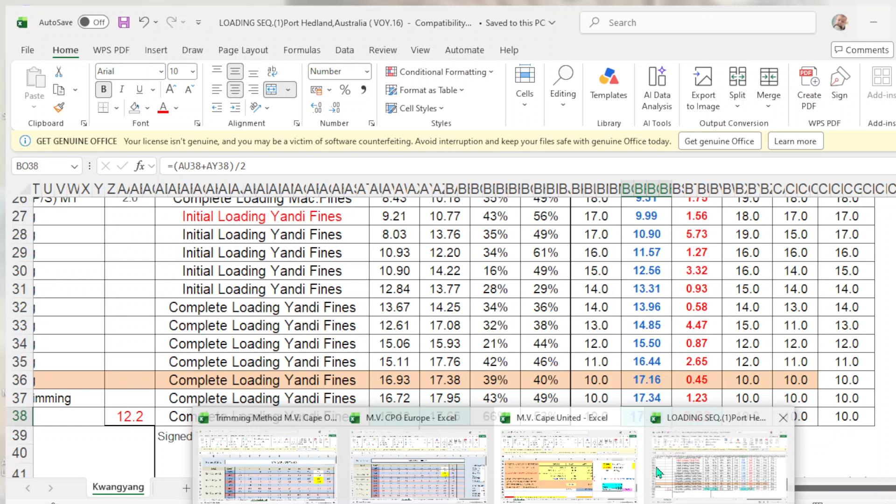The fourth one, form number 6. Form number 6 is how to find trim when handling several moderate weights. And your departure draft forward is 1743, aft draft is 1765. Your trim is 022 and your mean is 1754, which is the same with your sailing draft of forward 1743, aft draft is 1765, your mean draft is 1754, and your trim is 022.

Okay. So guys, you have 4 programs to back you up. So this is again by using the loading sequence for you to practice. So I named this program as practice number 3. So you keep doing this one, even doing this one at your vessel, at port, at home, at your office, or wherever you are. You practice this one regardless of your rank. If you're an officer, a student, teacher or instructor or whatever your status in life, you can avail of this program and practice this one until you will have self-confidence. So that's it, guys.